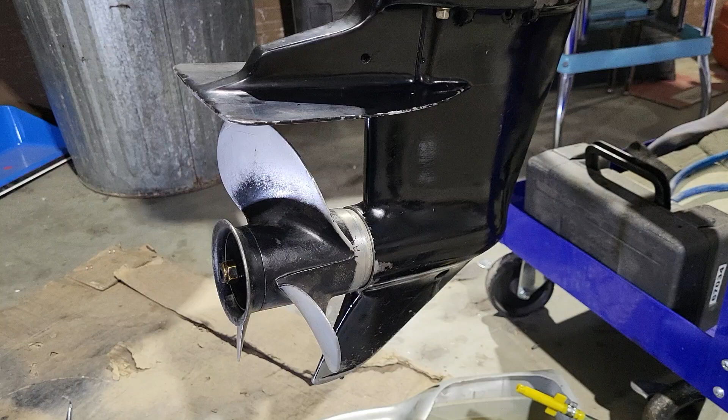Hey there, today we're going to go over how to replace the lower bearing carrier on a Mercury 8 horsepower lower unit. This is a 1993 unit. There's a serial number on it, but

before we get going too far, I just want to let you know there are a couple different lower unit designs on this motor. I have the service manual right here. If you want, that is the manual number right there for the engine that we're working on. You can see it goes from 6 horsepower all the way up to 15 horsepower, and a lot of, at least the 8 horsepower and the 9.9 horsepower.

The only difference in those that I can really find is the carburetor, and it looks like this carburetor was actually updated to a 9.9 horsepower carburetor, so different jet sizes and stuff. And then the WM23 is on the 9.9. But like I said, we are going to be going over the disassembly of the lower unit, how to take that off and replace the bearing carrier. It's actually pretty darn easy, not too difficult.

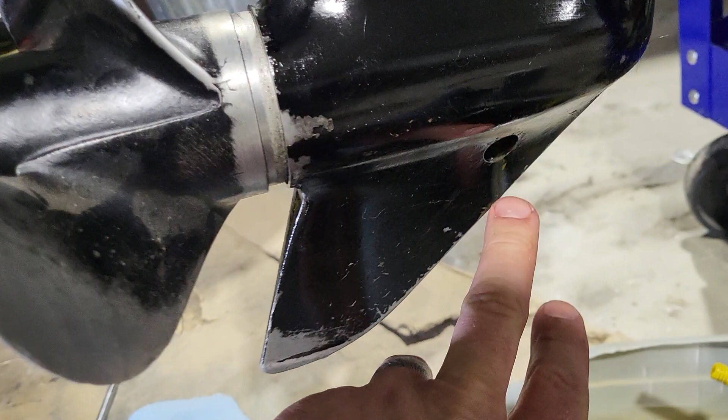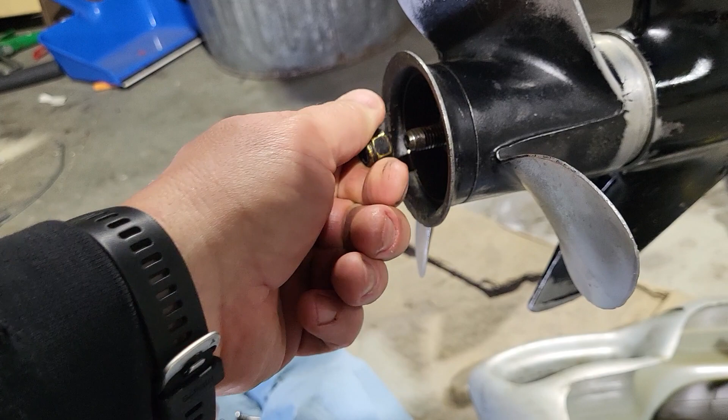First thing you want to do is drain the oil. As you can see, there's the breather plug right there. Then there's the actual drain plug right there. This thing was leaking. My buddy brought it over because the carburetor was spitting fuel out. I ended up doing that. It started leaking on my floor, so I was like, well, heck, we can fix that lower unit while we're at it. So all this is, you just unscrew that.

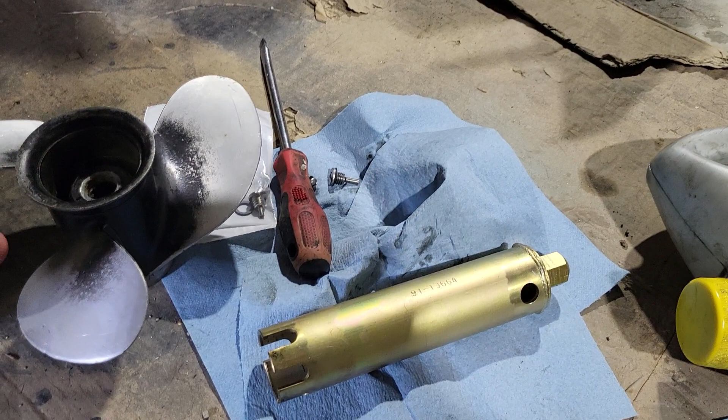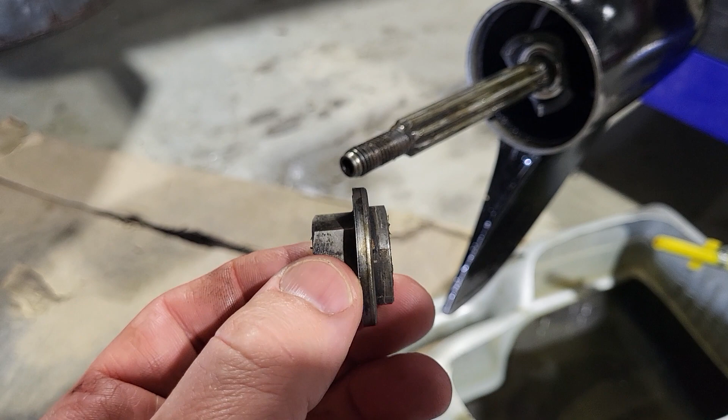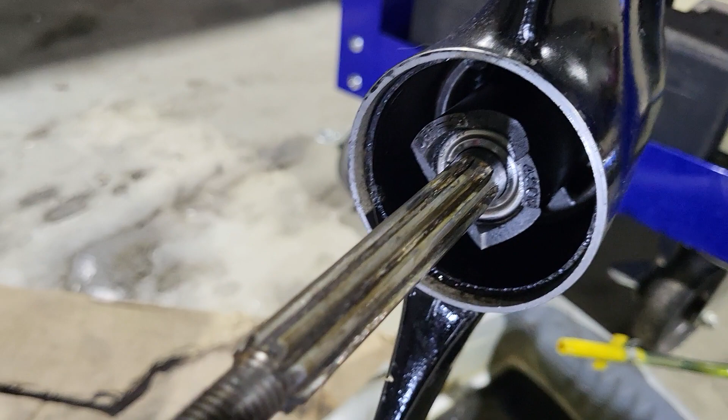Then inside there's another piece that pops off. Then the prop comes right off there. And I like to put all those pieces right in there. Then this piece right here just slides off. When I first saw it, I really wanted to crank on it, but no, it just slides right off. Then we have the bearing carrier. As you can see, this one is beat up because I didn't want to spend over $100 on this. Yeah, there it is.

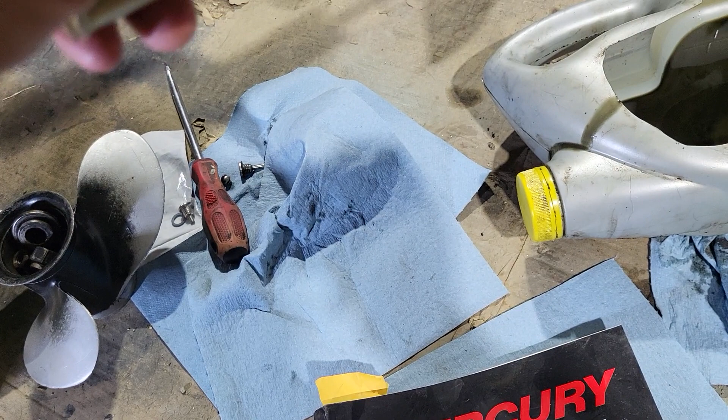Bearing carrier removal tool. I don't have the measurements on this, but it just barely slides right over the top. Oop, there we go. And this is actually left-hand threaded, so you have to turn it to the right to take it out. Without this tool, good luck getting this thing out. It's not going to go well.

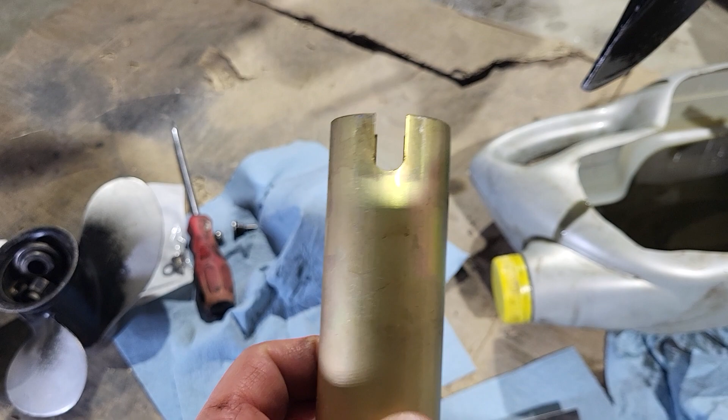Maybe you can make one, but like I said, it slides right over there, and then it has three, so that one's straight over, and then there's two other notches right in there. We can maybe go over that, and then this just slides out. As you can see, we will go over the parts real quick, but that's what it looks like when it pops out.

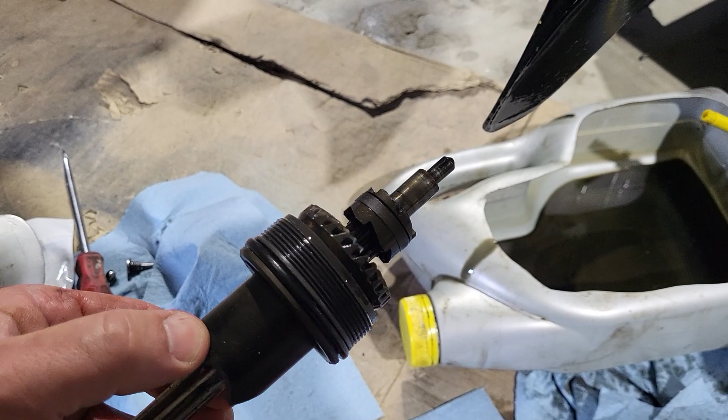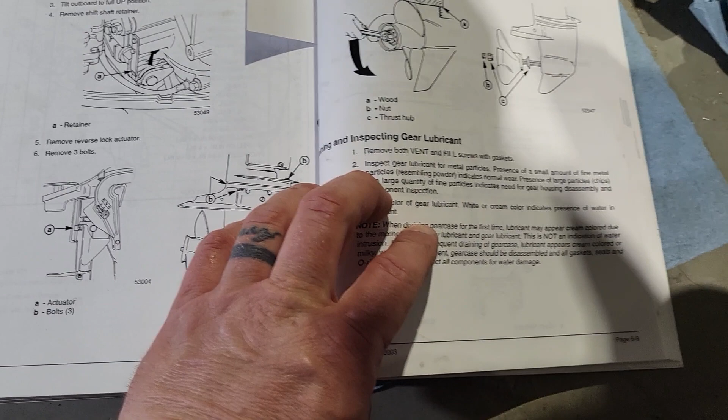So I had it. There we go, there's my bookmark. So this actually goes through it. It's page 6-9, and it's talking about taking that off right there. So it goes over all this right here. And now I will go over some of the pieces.

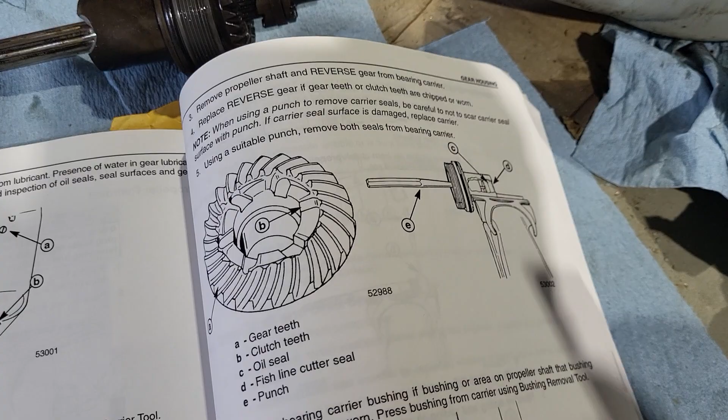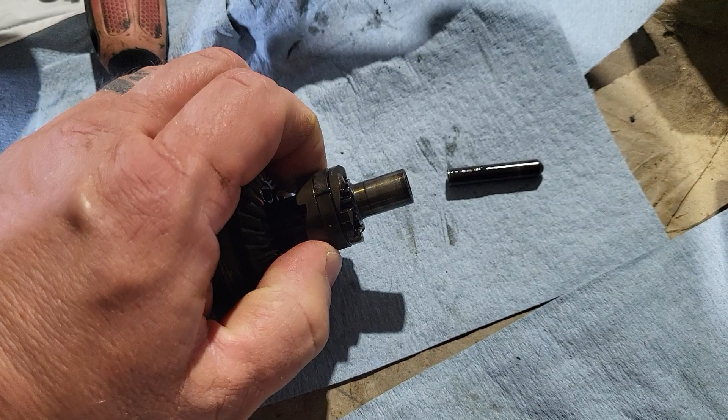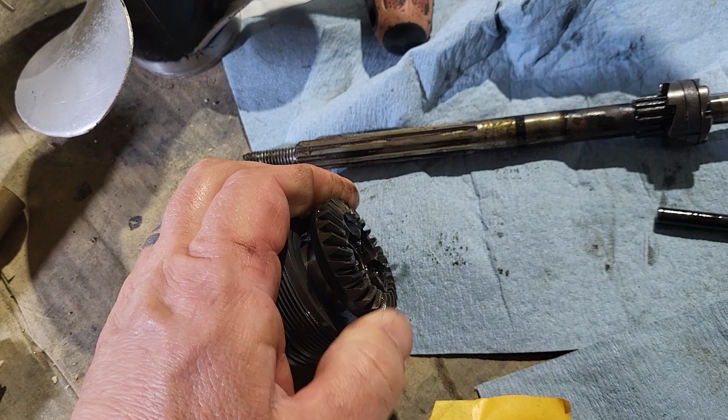So this little piece right here will come out, so don't lose that little piece. Like I said, I like to leave everything in order. So this slides out. I'm doing this on the floor, so I try to leave everything on there. Sorry for the wobbling. And then this here is the reverse gear. That just pops right out. That's all there is to it.

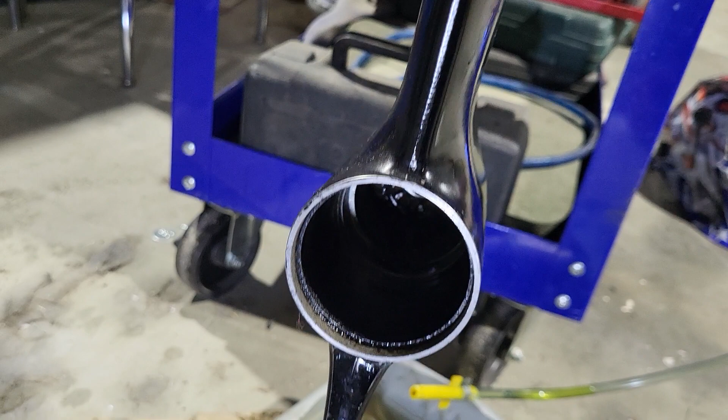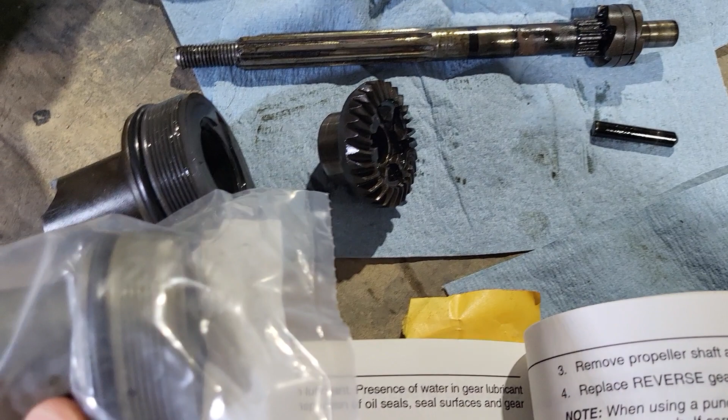Now, you can see inside there. I've already cleaned it out a little bit. I'll probably clean it out a little more. But all you do is apply your marine grease to this. I got some Lucas marine grease. Apply that right there. Then you install the reverse gear in there, and then you install your shaft. Put that back in there, and then reassemble. It's not a real difficult thing.

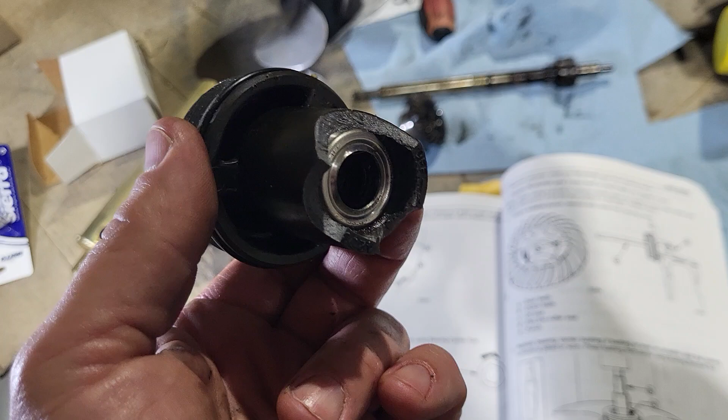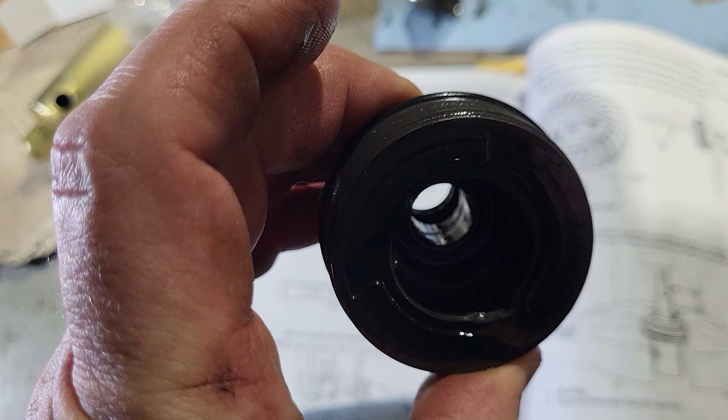Now, if you just want to replace the seals, let's say you don't destroy your bearing carrier, which I hope you don't, because the seals really are not that badly priced. The other reason I bought the whole new carrier is I felt bad because I destroyed my buddy's. But then the other thing is, there are actually two seals. There's a seal inside there, and then the metal seal on the outside. And then there's actually a bushing down inside there. It's kind of hard to see. But this goes over this right in here.

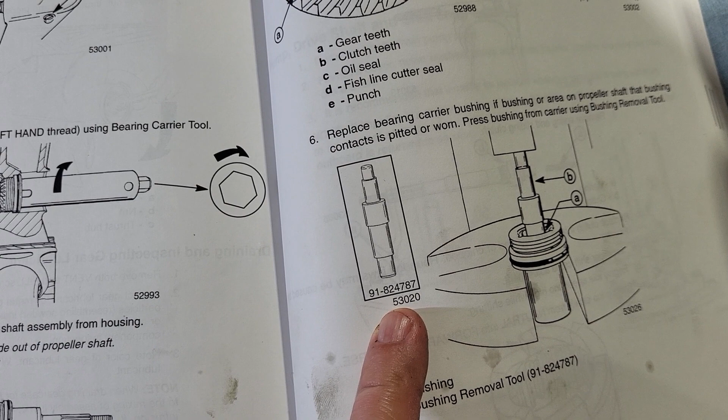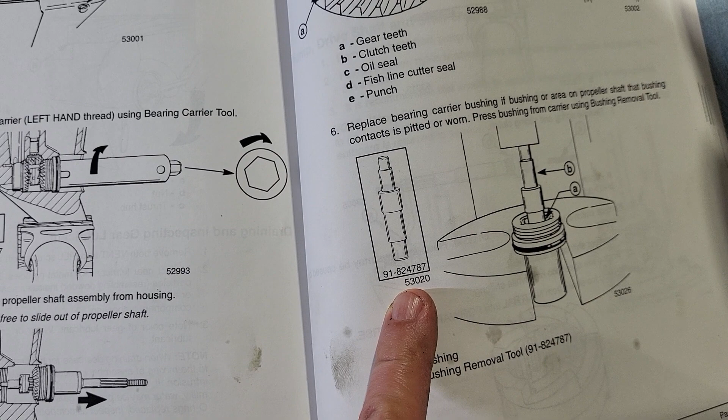And there's actually a mandrel. So if you do want to remove and replace those, you need this mandrel right here. It's 91-824787. I have no idea how much that one costs, but that's the one you need. I highly suggest you buy these tools so you're not destroying them. Right here you can see how you're supposed to remove them.

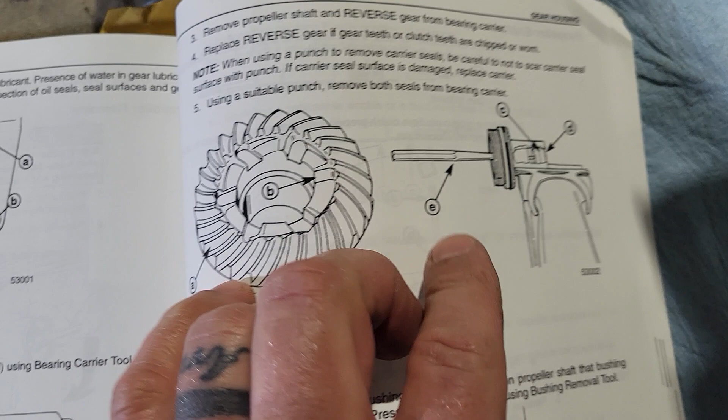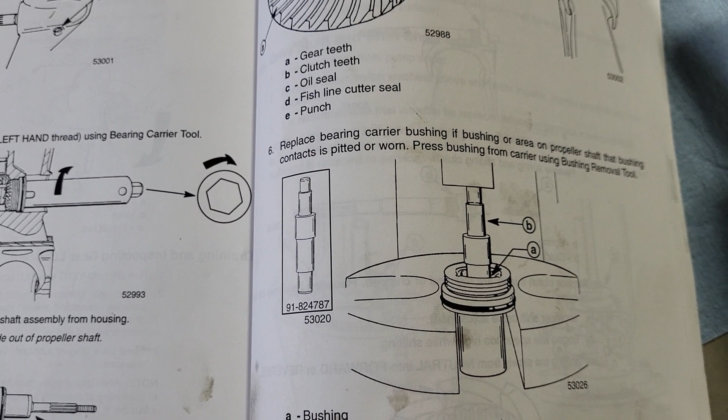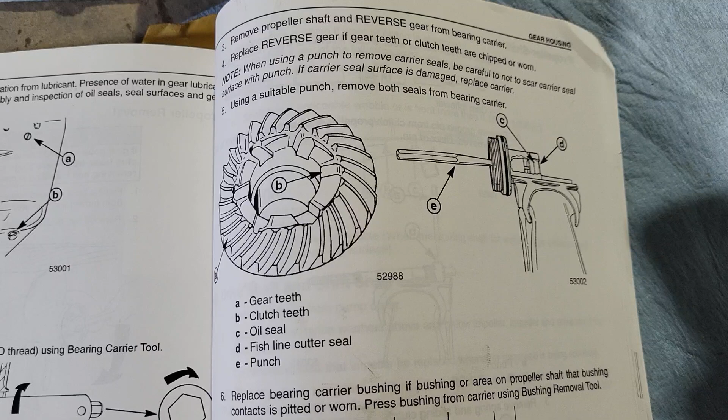D right there is the fish line cutter seal, and C is the oil seal. So there's two of them in there, and then there's also that bushing. That bushing, I don't know what I did with it, but I did originally buy them before I busted it. So there's a bushing and two oil seals right there. That's how you tap them out, and then to replace them, you use that mandrel and put them back in.